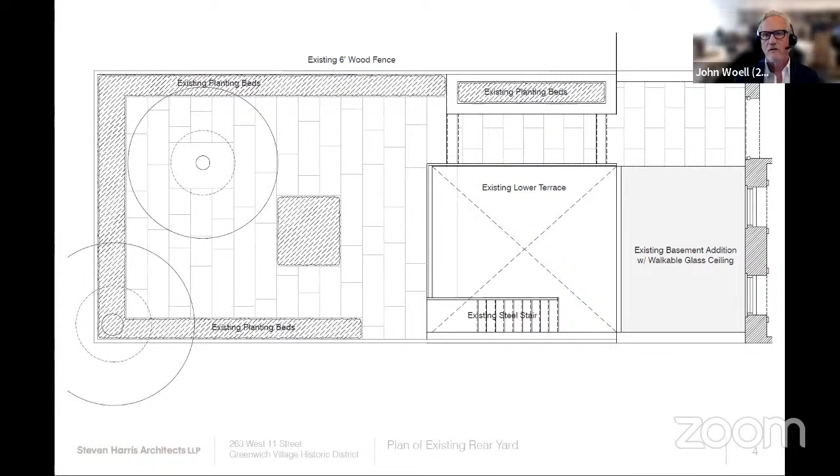The current rear yard is a combination of a glass addition, which was approved by the Commission in 1997, that opens onto an existing lower terrace. There's a stair in that terrace that takes you up to a rear yard, and then adjacent to that, there is another stair that takes you back to the house.

The proposed plan reduces the dimension of that existing lower terrace by approximately 5 feet, shifting it closer to the house, and reconfigures the stair into the backyard by sliding it underneath that construction to the east.

The pool and the excavation have been located so as to be 5 feet off of the rear lot line, over 9 feet off of the east lot line, and approximately 4 feet 4 inches off of the west lot line. The pool depth is approximately 4 feet 6 inches on average, going from 7 feet 6 inches to 3 feet.

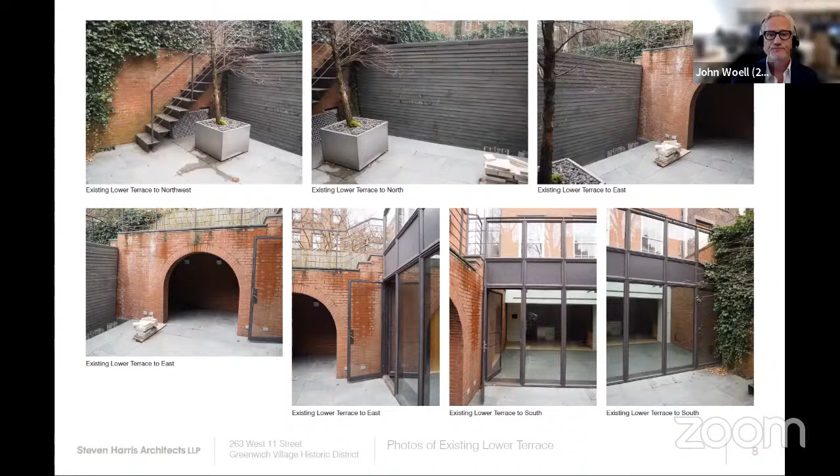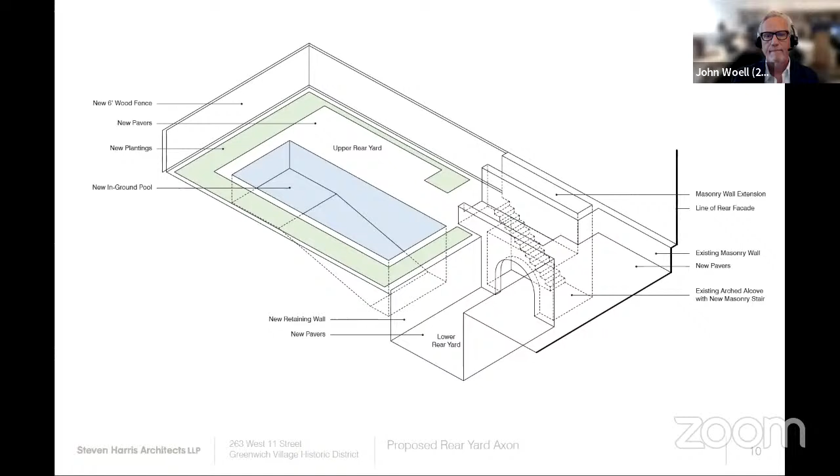This is a drawing or rendering of the materials in context. The perimeter will have plantings around it, and a number of large trees will be introduced. The courtyard will be reduced by about 5 feet. The pool will be constructed approximately 4 plus feet off of the west, and the water surface itself more than 5 feet off the north, and then 9 feet off the east. None of this work is visible from any of the public right-of-way.

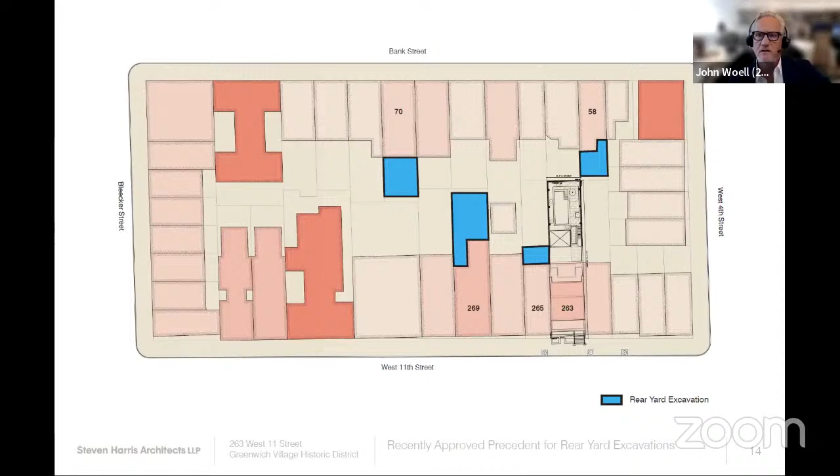Within the donut itself, there are a number of significant excavations that have been approved in recent years. I'd like to review each of those as a precedent. Let's start with 58 Bank Street.

58 Bank Street also has a swimming pool. It is a full width lot excavation, excavated to 17 feet below the yard, full width, holding back a little bit from the rear lot line, with a swimming pool underneath that garden. This was approved in 2018.

This is 269 West 11th Street, approved in 2019. This is full width excavation again, approximately 16 or 17 feet below grade, and has a pool as well.

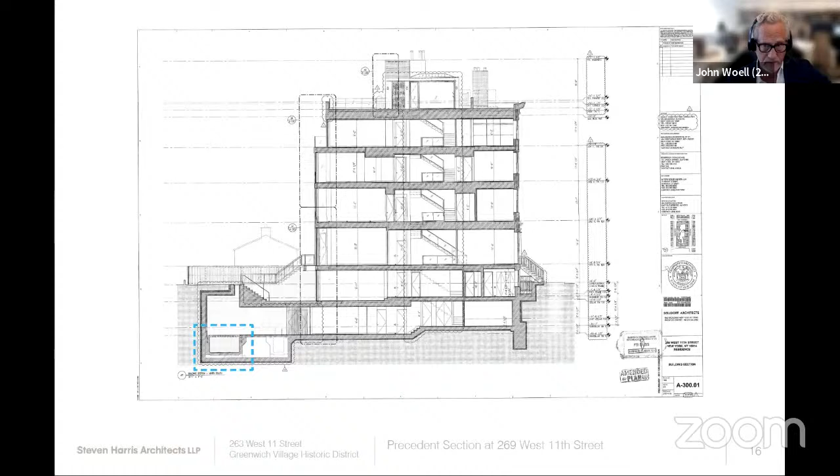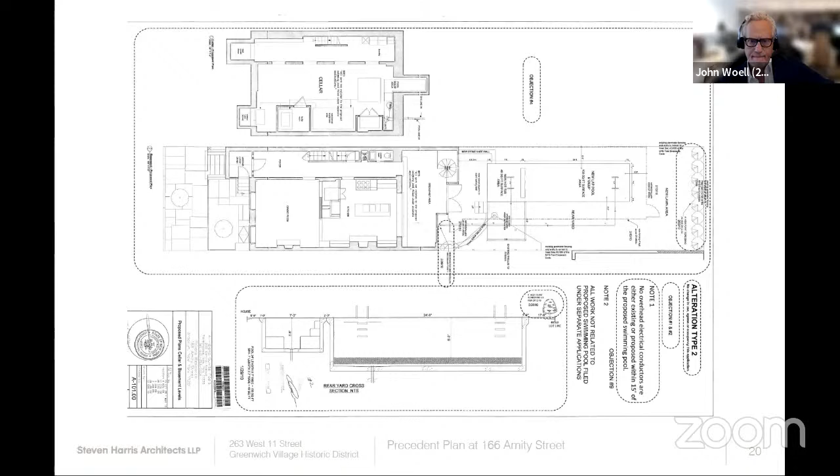Again, showing a section of that in the rear yard. And then in the Greenwich Village Historic District itself, this is 30 Perry Street, a swimming pool that was approved in 2005. Here's the approved drawings.

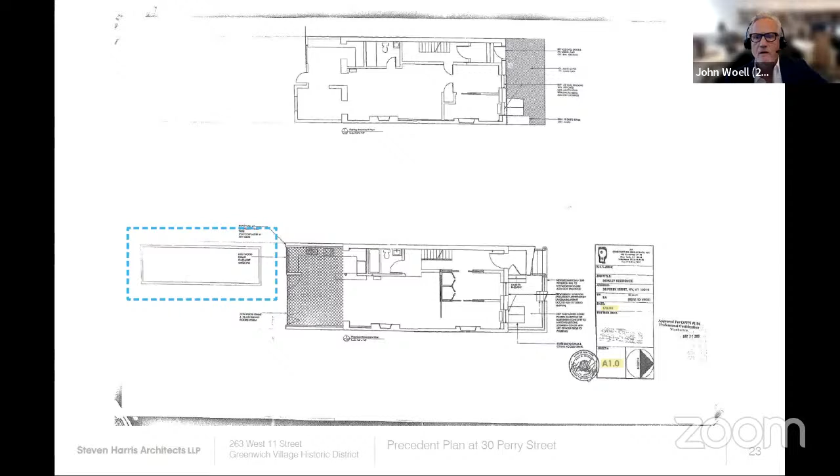And back to the section, Leo. Thank you, commissioners. Please let me know if you have any questions.

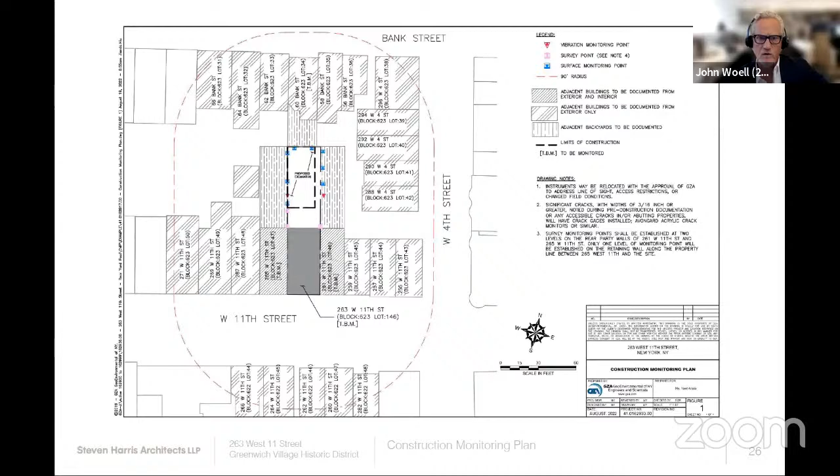Next, Leo. And then this is the monitoring plan that has been produced, which will help monitor the work as it proceeds. Back to the section if we can.

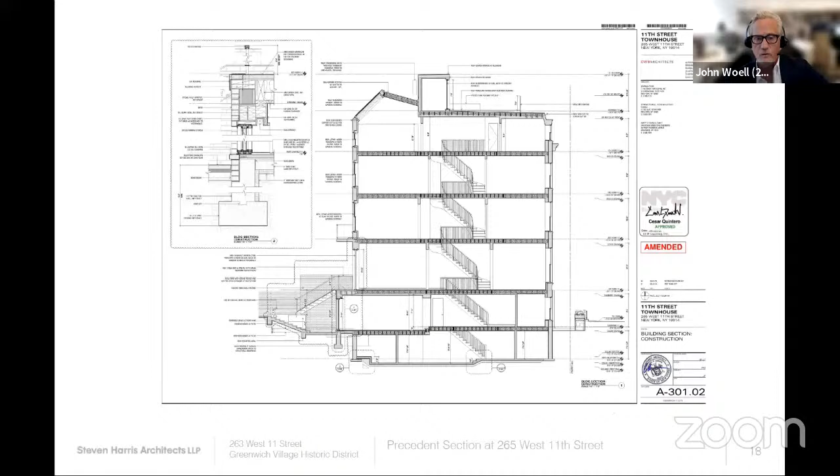So I think that one thing to point out as well is that there are 2 other swimming pools that are already in this donut. They are subterranean, but the questions raised by the neighbors about water would apply to that as well. And we are not aware of any ill incidents that have happened as a result of those pools being located there. Lastly, I would say relative to village preservation, I would say that this will not be unprecedented as we've shown.

There is a precedent 2 blocks away. It's been there for 17 years. No one seemed to have known that it even was there because no one has been paying attention. It doesn't seem to me that this is happening very frequently in the village. Thank you.

Okay, thank you. And John, can you just also speak to the 5-foot surrounding area and how that is incorporated into your plan or not? Yeah, this is going through LPC as part of the approval necessary for DOB. And so the plan as laid out with the 5-foot rear and the 5-foot back, the landscaping is considered to be an area that can be walked in order to provide safety should someone need to be rescued.

Okay, Commissioners, do we have any other questions? All right, I'm not seeing any questions, so I'm sending you all a request to unmute so that we can begin our discussion. Commissioner Devonshire, would you make a motion to close the hearing? So moved. Thank you. And Commissioner Lutfi, would you second that motion? Second. All in favor, say aye. Aye. Any opposed? All right, the hearing is closed and we'll begin our discussion.

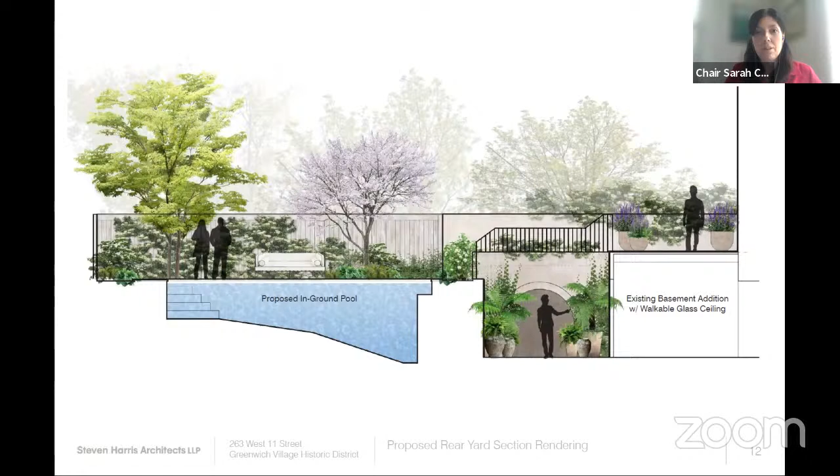And as we know, in rear yards, we review at staff level changes from paving to plantings and different paving patterns in the rear yard. So whether it's planted or paved is not necessarily the question before us, but it is a question of the pool excavation, which we do review, and we do require that you pull excavation back from the rear lot line to ensure the ability for potential deep planting.

And as the applicant has presented, we have also approved pools in this particular block, subterranean, but I think would have similar structural provisions in place and similar sandy soil. And we have approved pools at the rear yard level, I think once in this district and another in Cobble Hill Historic District. And I think I might be forgetting others, but so there is some precedent for excavation and for pools. And certainly we've approved excavation for other uses as well, below buildings and in the rear yards.

And as always, excavation would have to be monitored very closely by the Department of Buildings and approved by them. But it is something that we also look at carefully to the extent that we can, although DOB is the expert on structural issues. So we'll begin our discussion.

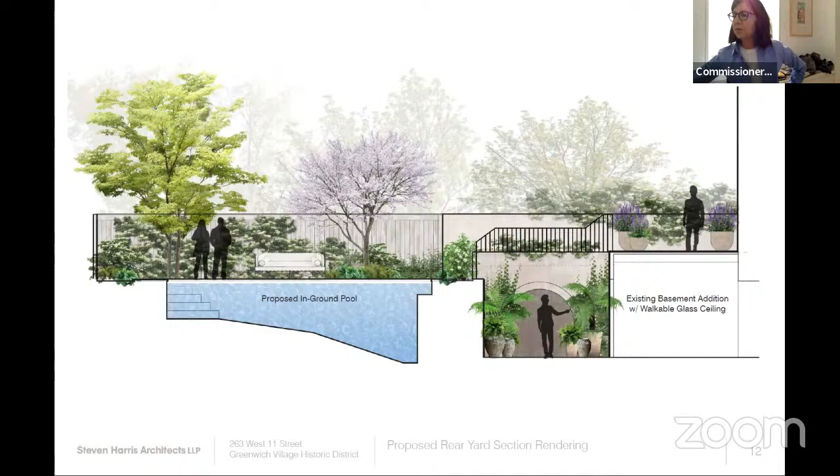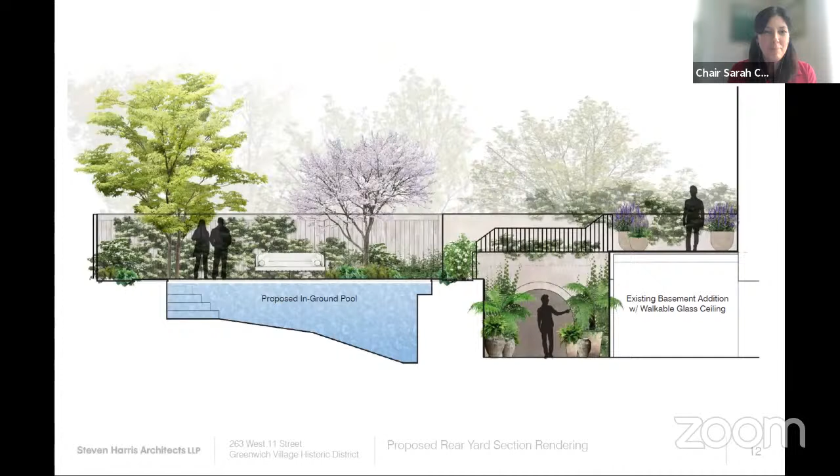Next item is public hearing item number 6, LPC 22-12020, an application for a certificate of appropriateness in the Borough of Manhattan, block 501, lot 8, 427 to 429 West Broadway in the Soho Cast Iron Historic District. This is a pair of Italianate style store and warehouse buildings designed by Robert Mook and built in 1872. The application is to replace entrance infill and install a security gate.

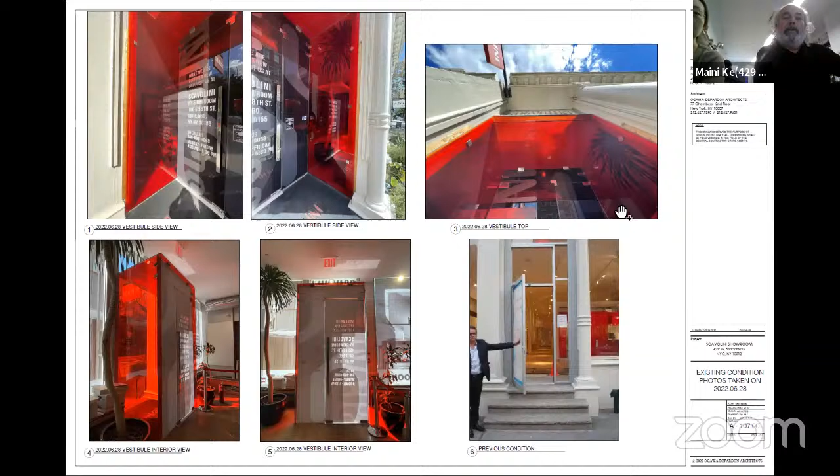This is the enclosure, a red glass enclosure, and as you can see on the top right pictures, there's wood blocking attaching it directly to the metal frame shown in the bottom right picture. That used to be the original door. So they kept the original aluminum frame and just infilled with this glass enclosure to create their new entrance to the store several years ago.

Those are the tax photos, which don't show very much, unfortunately. This is the existing condition as it is currently—a door roughly 8'9" tall, but the floor to transom height is almost 13 feet.

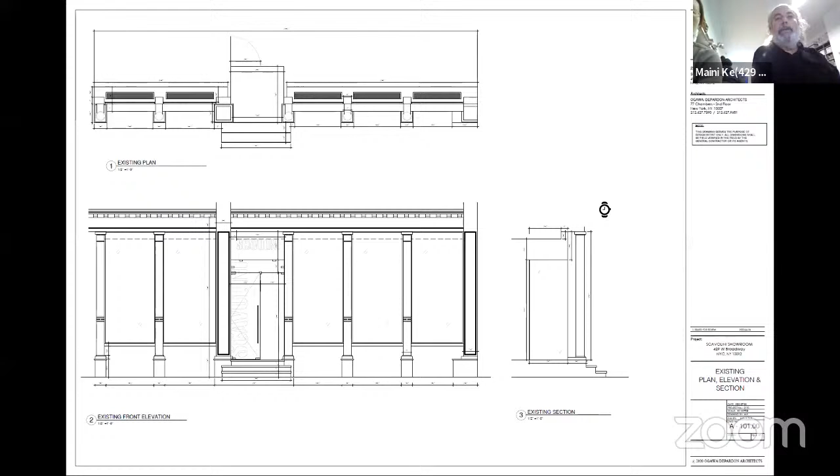What we'd like to do is replace that entire entranceway with a weather-enclosed vestibule, meaning actual walls on both sides, with a gate built into this enclosure, and a more or less full height door with transom up to 13 feet. It's slightly lower because there's a lower ceiling inside of about 9 inches, which you can see where the '429' is written on top—that's the ceiling height. We'll create a small soffit there, but basically it's a full height design.

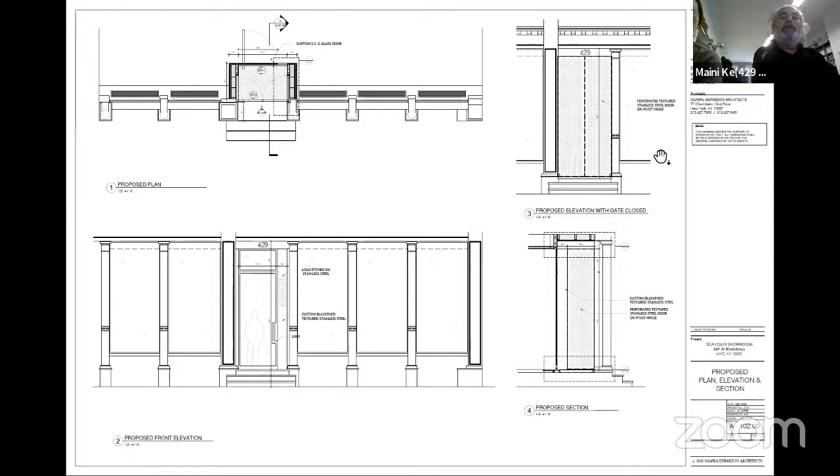The view in the right-hand corner shows the shutters in the shut position. But when they're in the open position, if you zoom in on the doors, you can see that they tuck in neatly into the walls, so they're not seen at all when open.

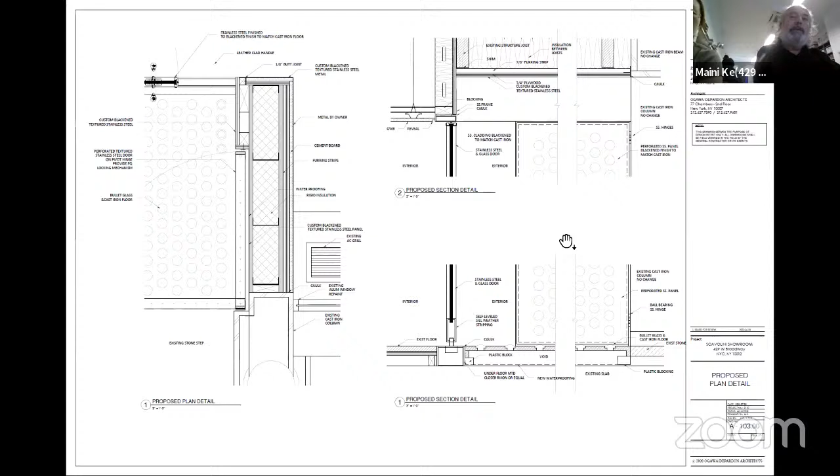That's essentially the application. The materials will be cast iron bullet glass for the floor, and all other materials will be a matching blackened stainless steel—acid etched stainless steel matching the same finish. We have a sample we can show you, and then a stainless steel glass door. The bottom rectangle is the stainless steel we're planning to use, which has this blackened finish.

This is just to show you some examples of doors in Soho, most of them on West Broadway, tall and skinny, more modern doors which are precedents that have been done. Some of these are actually on the west side of the street, which I know was not landmarked for a long time. So that's what that is, and I'm happy to answer any questions. Okay, thank you very much.

All right, commissioners, do we have any questions? All right, I don't see any questions at this time, so let's see if we have public testimony.

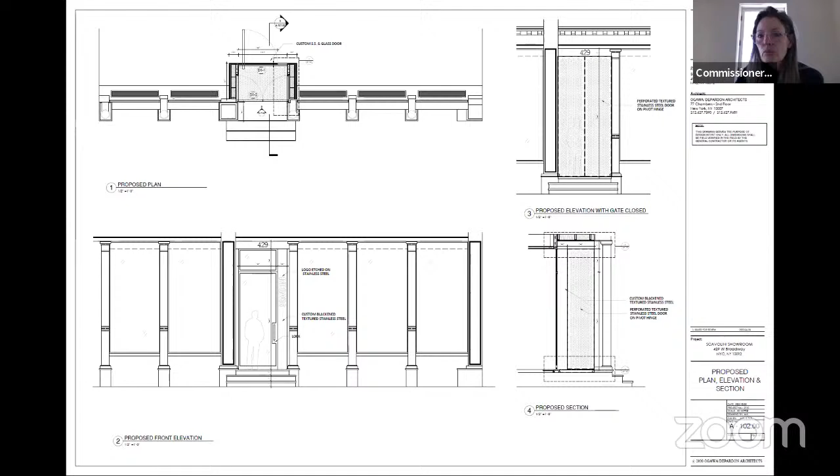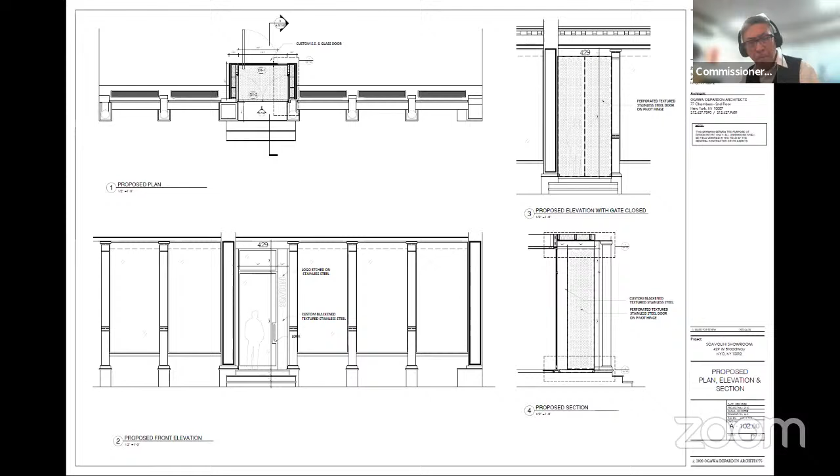Chair Carroll, aye. Commissioner Bland, aye. Commissioner Shamir Barron, aye. Commissioner Chapin, aye. Commissioner Chen, aye. Commissioner Devonshire, aye. Commissioner Gustafson, aye. Commissioner Lutfy, aye. With 8 in favor, none opposed, the motion passes. So that's approved. Thank you.

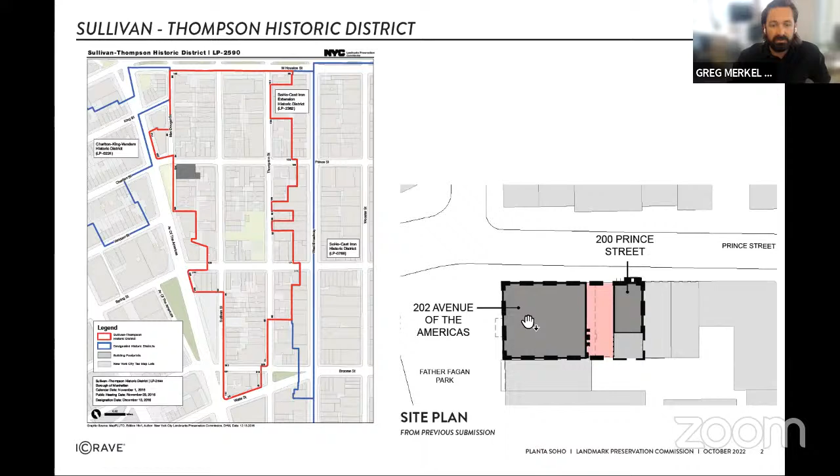The restaurant is located on the ground floor at the southeast corner of Avenue of the Americas and Prince Street in the Sullivan Thompson Historic District. There are two white brick buildings owned by the same entity, a 6-story building on the corner and a 4-story building on Prince Street. Between the buildings is an open courtyard, which we'll be using for outdoor seating.

The buildings were redeveloped and reclad in white brick by the architect named David Krause in the 1960s. The December 2016 Thompson Sullivan Historic District Report notes the buildings as non-contributing, meaning they do not contribute to the historic district's sense of place. The style is noted as no style. You can also see, in the lower right-hand corner here, that there used to be a white brick low wall that spanned between these two buildings. We'll tie into this later.

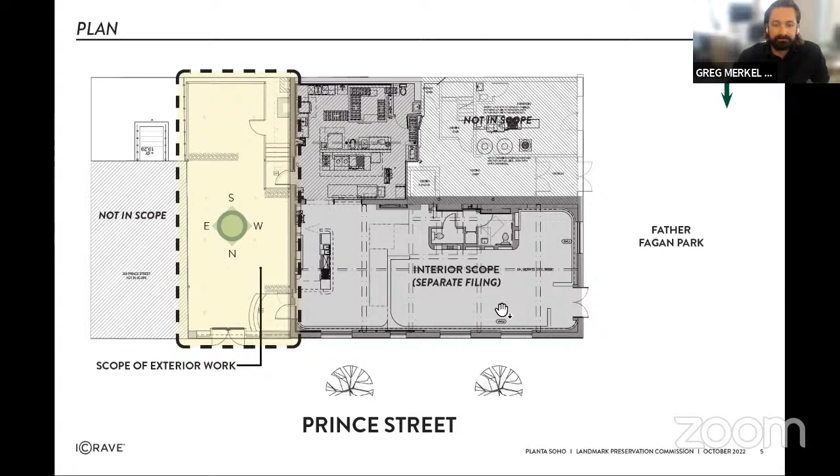Here you can see a plan of the restaurant shaded in gray and the courtyard highlighted in yellow. The space was a florist shop up until recently with a metal and plywood wall between the buildings. The wall had a roll down shutter.

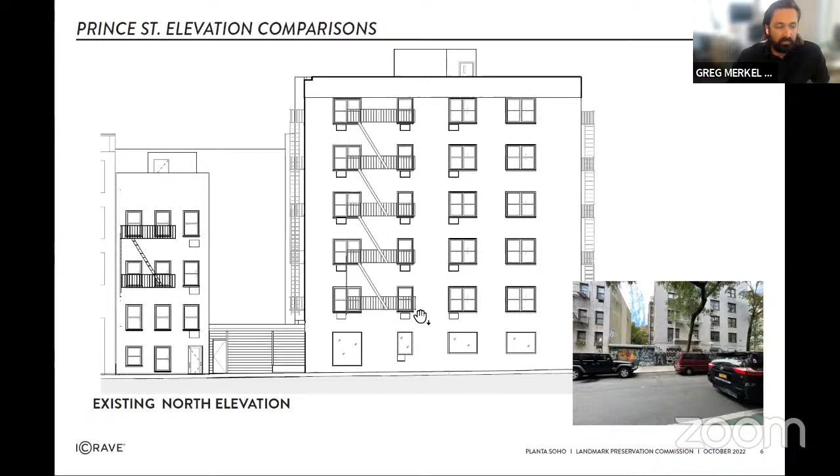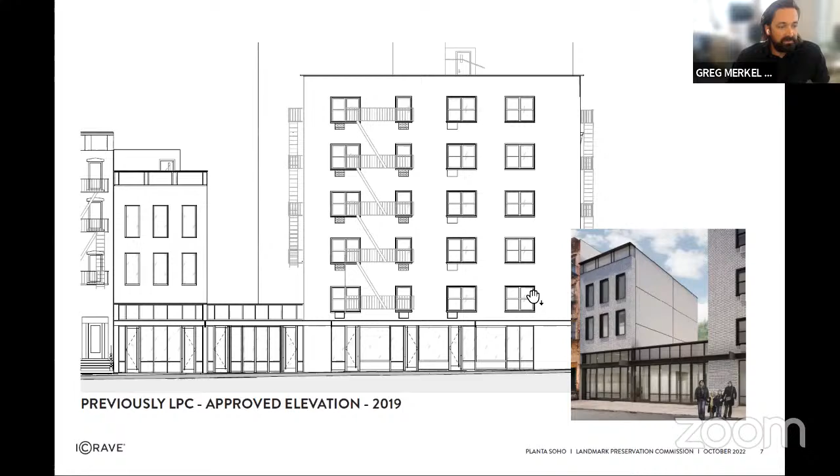In 2019, the Landmarks Preservation Commission approved a steel and glass reworking of the entire ground floor, including in both buildings and the courtyard area. You can see that here. We are therefore proposing a modest design that brings back the white brick wall from the 1960s.

As this wall is a design that reverts to the previous iteration, we hope this can be approved with greater ease. The other elements, the halo lit signage, the bracket sign, these will follow the LPC signage guidelines, so we hope that those can also be approved with greater ease.

We want to support the street wall, so the new wall is coplanar with the walls of the adjacent buildings. Just the doors are recessed for code reasons—when open, they cannot protrude more than 18 inches into the public domain. The door frames would be black metal, the same color as the design approved in 2019, and a match to the building's existing window frames. We want to harmonize with what is already there.

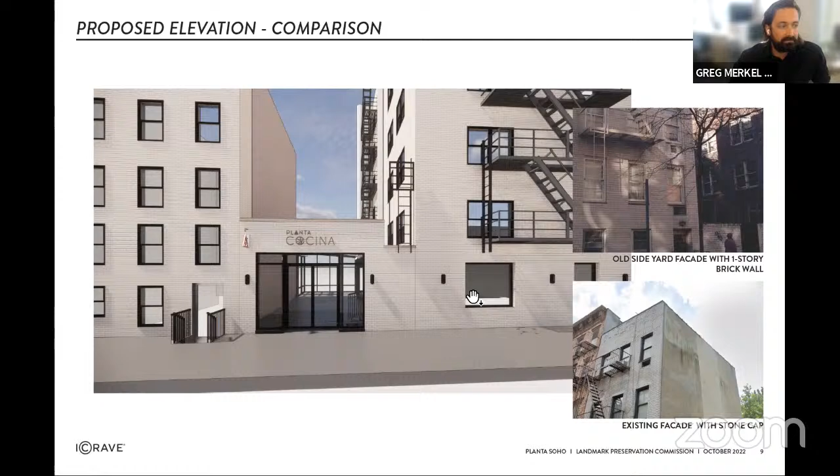Inside the courtyard, the boarded up masonry opening on the west wall would be bricked up with a slight recess to signify that a window was once there. The masonry opening on the right would be changed to a door and a window and would not directly align with the windows above, similar to the 6th Avenue entryway to the upstairs apartments that you'll see in a second. So these are the openings, bricked up, new door and window here.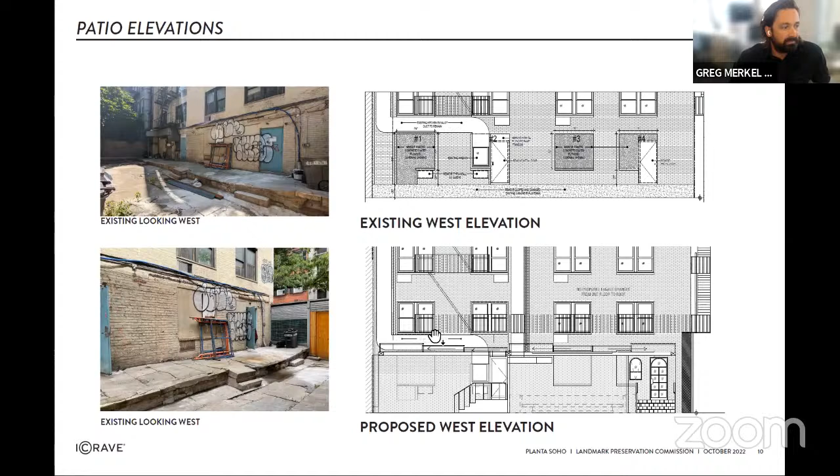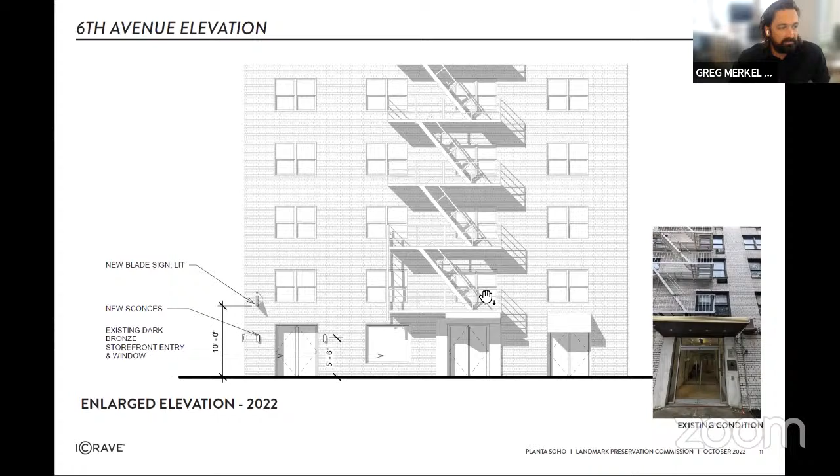This is the 6th Avenue side, where you can see the restaurant entry door, new sconces, new blade bracket sign. As well, you can see that there is a non-aligning door. This is the main entry door into the apartment, which does not align to the windows above.

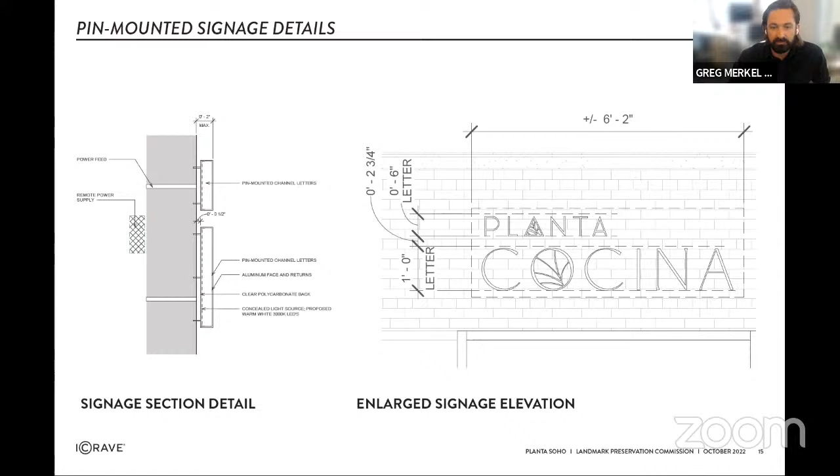The wording of the signage is made up of halo lit pin mounted channel letters. The letter sizes are 6 inches and 12 inches high. They stand 2 inches off the wall. The bracket sign is shown here. It is 18 inches high, 2 inches wide, with a 5-inch wide mounting plate, and it stands 19 inches off the wall. The finish would be rose gold. The signs are top lit, as mentioned, with a specified fixture.

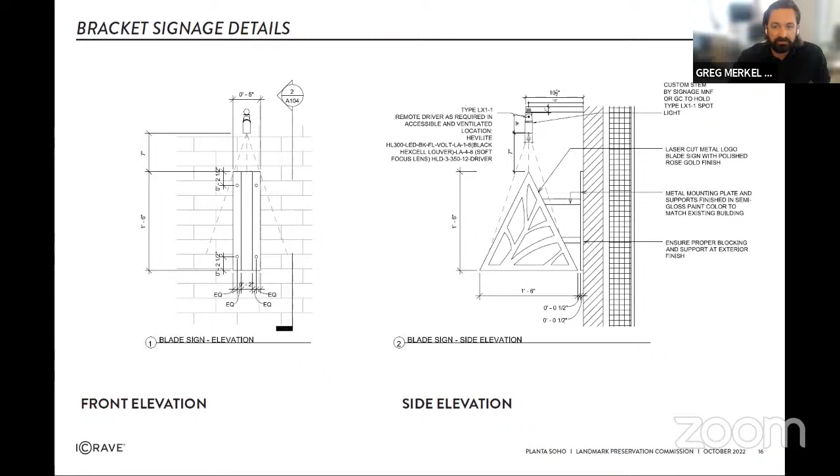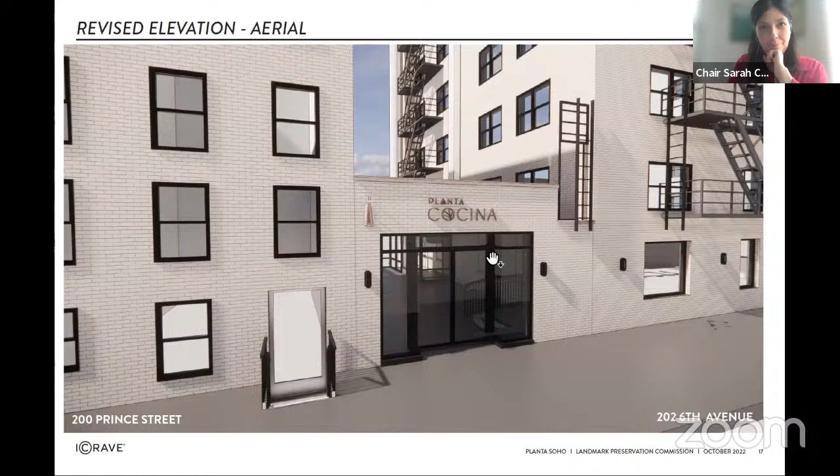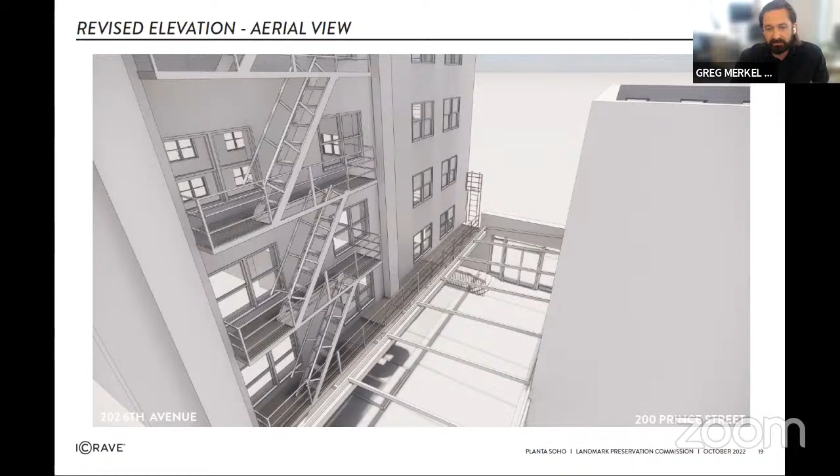Finally, this view from the back shows the various elements, including the roller cover, sliding glass cover. This is not visible from the street, other than looking through the windows. We understand that there are certain elements that will be reviewed by the DOB for code compliance, like door sizes, exit pathway distances, etc., and the State Liquor Authority for operational issues such as background music or operating hours. We have been working separately on these items and assure compliance. Our focus here are items that pertain to Landmarks Preservation Commission issues.

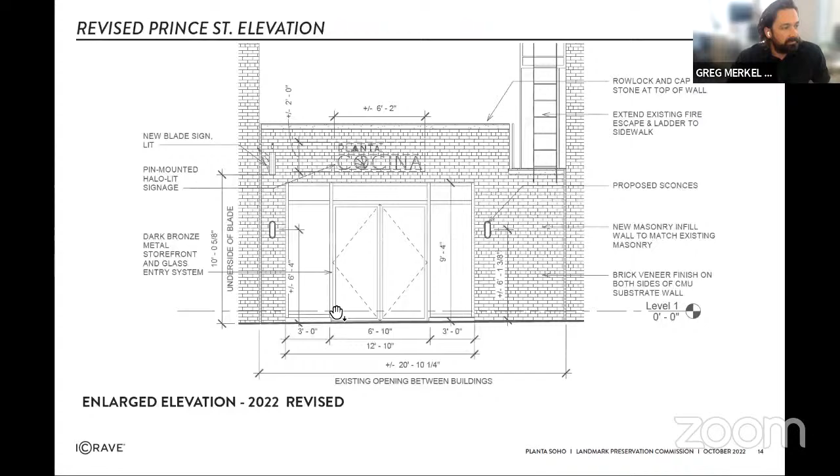Okay, and thank you. Thank you very much. Thank you very much. Okay, commissioners, do we have any questions?

All right, I don't see any questions at this time, so why don't we see if we have public testimony. If you're in the meeting and would like to testify on this item, please raise your virtual hand so we can identify you.

I will turn it over to Sonia Gior to take us through the testimony. We do not have any signups in advance, and I'm not seeing any hands raised presently. So I will note for the record that Manhattan Community Board 2 recommended denial of the roll cover, the design of the street wall, the blade sign, and the infill wall sign. We also received 3 letters in opposition to the application expressing concerns over the facade as contextually inappropriate and the indoor space expansion. I'll turn it back to you, Chair Carroll.

Okay, thank you very much. So I'd like to turn back to you, Mr. Merkel, and ask if you'd like to respond to the comments. I know you had an earlier design, and that may be what you presented at the community board. If that is the case, you can explain that.

Yeah, I think those are in reference to what was presented before, which was a design that, while it was interesting and looked good, was deemed not appropriate for the neighborhood. So like I stated in the beginning of my presentation, we went back and really tried to think of how to best make this truly appropriate for not only the neighborhood, but for the site.

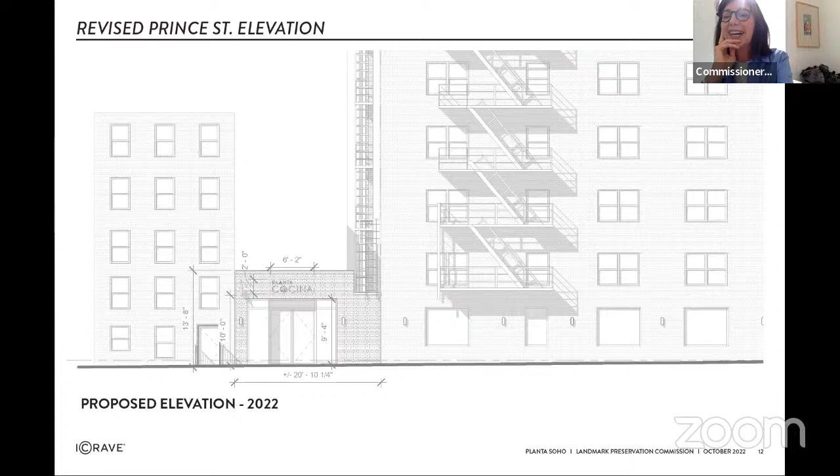Sure. This is a big difference from what we had approved, which I remember thinking was very interesting. But this is, I think, not only interesting, but very well done in an understated and discreet way. It completely blends in with what is there, and it makes very efficient use of whatever available space exists. I like the use of the white bricks, and I hope they can match pretty closely. I think the sconces are very understated. The retractable roof is really smart, and it's nice that it's off the street. I think it's well done. I can approve this.

Okay, thank you. Commissioner Gustafson. Yeah, I saw the comparison to what we approved previously, and then my reaction was, what were we thinking?

This is a great use of a non-contributing building. It's a much improved proposal. It's a terrific use of a gap in a street wall and a way to fill it. It conforms, it improves on what's there, it does no damage, and it activates the street. I'm all in.

Thank you. Commissioner Shamir Baran: I agree. This is a really interesting design, and it's appropriate for the location.

Commissioner Chapin: I remember the previous proposal, which I liked some aspects of, but would have liked a few changes in. I really like this. I think this is great. I think it's just right.

Thank you. Commissioner Devonshire: Excellent, I can approve it.

Commissioner Chen: Likewise here, I agree with Commissioner Gustafson. What were we drinking? Wasn't that long ago. Commissioner Bland: Was that drinking or thinking?

I'd love to say this is a great scheme, approvable scheme, appropriate scheme for two non-contributing buildings.

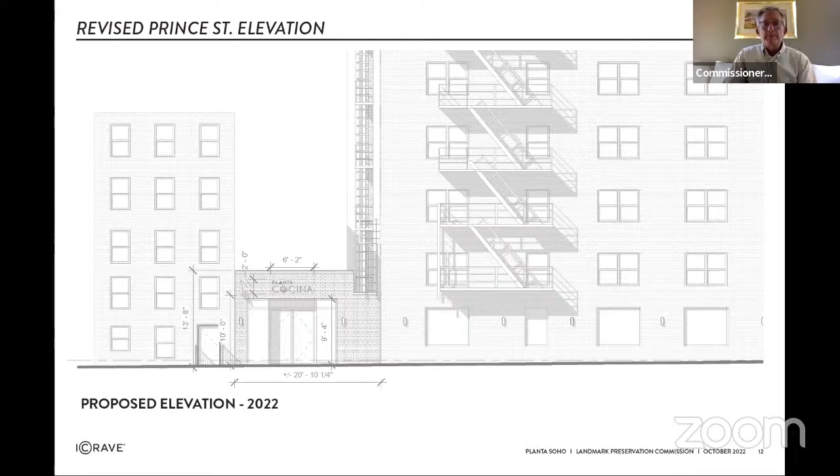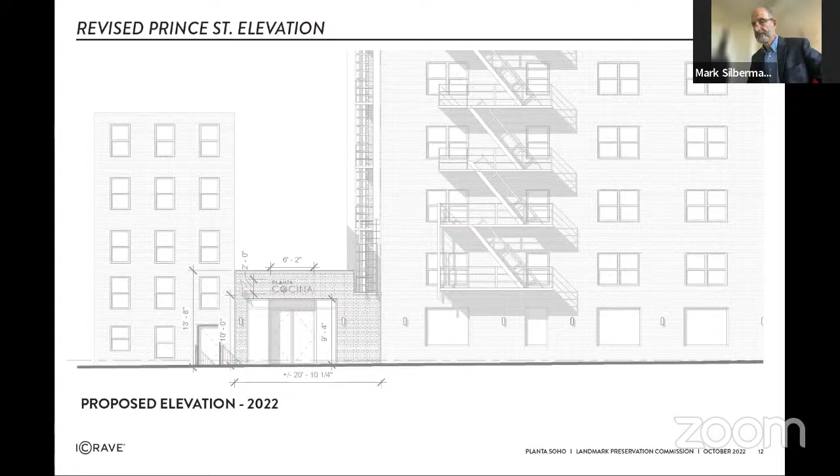Chair Carroll, Aye. Commissioner Bland, Aye. Commissioner Shamir Baron, Aye. Commissioner Chapin, Aye. Commissioner Chen, Aye. Commissioner Devonshire, Aye. Commissioner Gustafson, Aye. Commissioner Lutfi, Aye. With 8 in favor, none opposed, the motion passes. So that's approved, thank you.

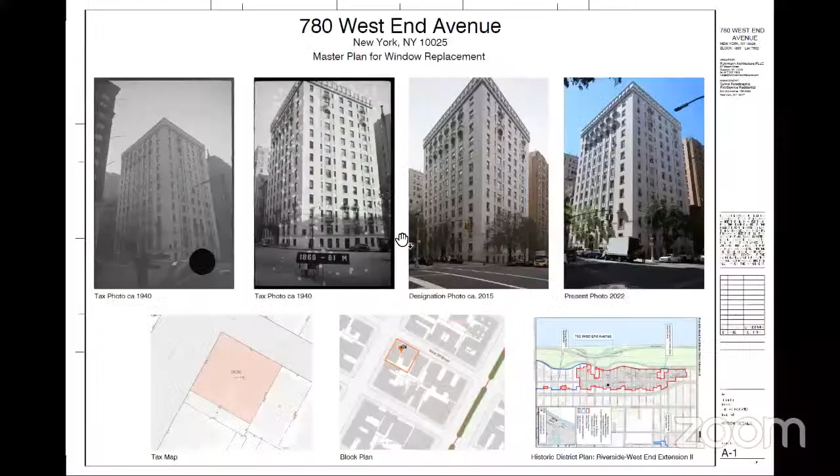Good afternoon, Commissioners. Richard Lowry, Preservation staff. So the proposal, as Corey mentioned, is the master plan for windows at 780 West End Avenue. As you can see from the historic tax photograph on the left, the historic configuration of a number of windows are 2 over 2, if you can see on the corner, and then there are some very wide windows which have a 3 over 3 configuration. Previously, the commission heard last year an application for a single apartment to install 1 over 1 windows, and that was approved with modifications to go back to the historic configuration, and comments were made that a single apartment would look odd. So consequently, the owners of the building have come in for a full-scale master plan, and they are proposing to go with 1 over 1 double-hung windows.

Just to give you some shots of the courtyards on the front facades, there are basically 2 historic windows remaining, which are at the courtyard. You can see them in the bottom left corner.

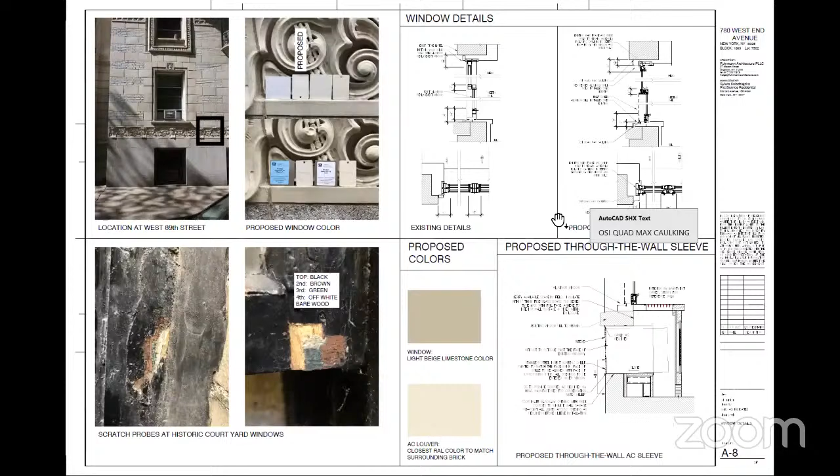And then here are the detailed window elevations and sections. The architect, Helga Furman, is here to answer any questions. Thank you very much. Okay, thank you, Richard.

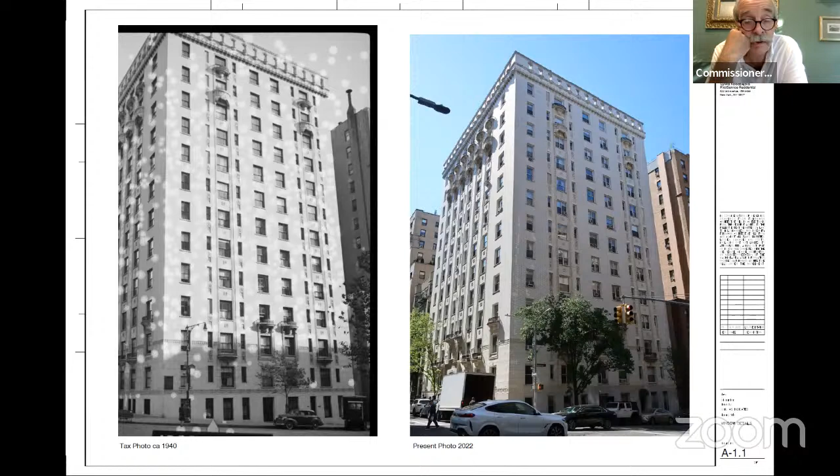Okay, thank you. Commissioner Devonshire? In my opinion, much of the articulation comes from the original windows. It's a once in a lifetime opportunity to get rid of Orphan Annie and go back to the 3/3.

Okay, thank you. Commissioner Chen. I guess the majority seems to be now preferring to go back to the original, so I would defer to the majority.

Okay, so we definitely don't have enough to vote to approve the 1/1 today. And I believe actually going back to the original configuration would be a staff level permit. So I think we can take no action and ask the applicant to continue to work with the staff. And I assume that any proposal for secondary facade windows would also be handled at staff level pursuant to the rules and would meet those rules. Okay, so we'll take no action on that item and we'll move to the next hearing item.

Okay, the next item is -- all right, public hearing item number -- whoops. Commissioner Lutfi, do you have a question? So I just want to make sure I understand. So does that mean that they'll make individual applications and then they'll come to us?

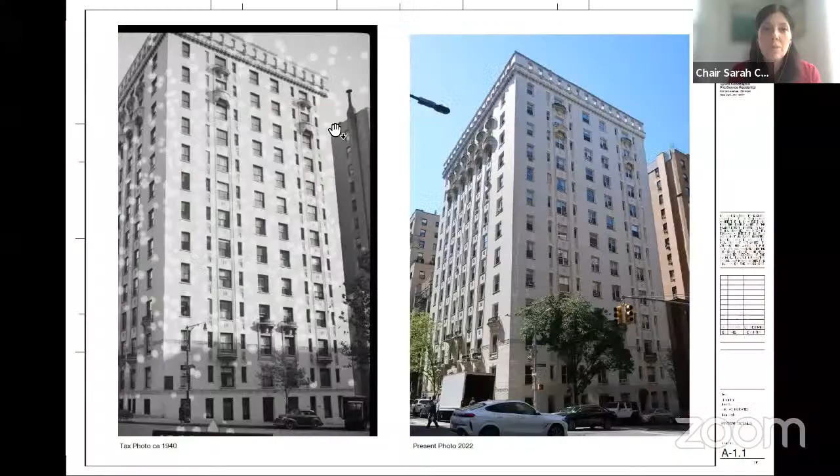They can choose to do a master plan for the historic configuration on the primary facades, and that would be eligible for a staff level permit because it would be matching the historic configuration. Okay, got it. Okay, thank you.

That's great. Thanks. All right, next item is public hearing item number 9, LPC 22-02413. An application for a certificate of appropriateness in the Borough of Manhattan, block 1166, lots 13 and 14, 231 and 233 West 74th Street, the West End Collegiate Historic District Extension. It's a pair of Queen Anne style row houses designed by William J. Merritt, built in 1885 to 86, and the application is to reconstruct the front facades.

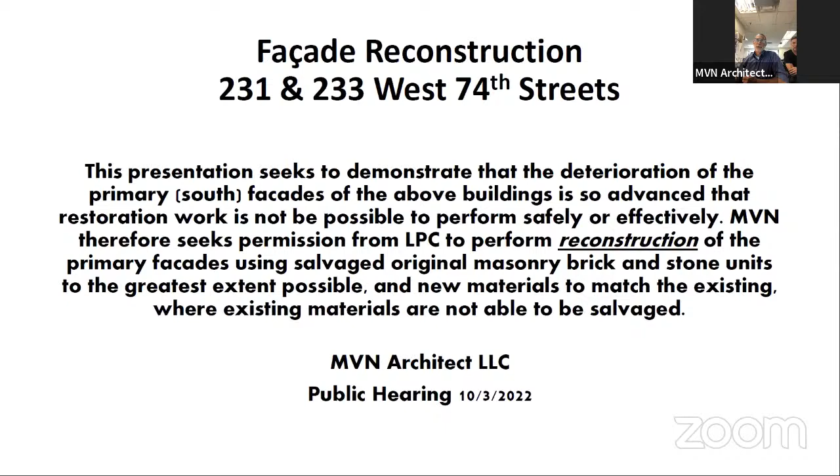The reason we're here is that we are asking for the public hearing approval for the reconstruction of the facades, after a consideration of the options versus the option of restoration versus reconstruction. And we feel that reconstruction is the only way to address these buildings.

You can see from the buildings that there's a considerable amount of vertical displacement on the front facade. You can see it at the street wall, at the stairs, at the base of the building, at the tilting stairs, and at the lintels, at the top of the parlor floor, the second floor, the third floor, and so forth as we go through the building.

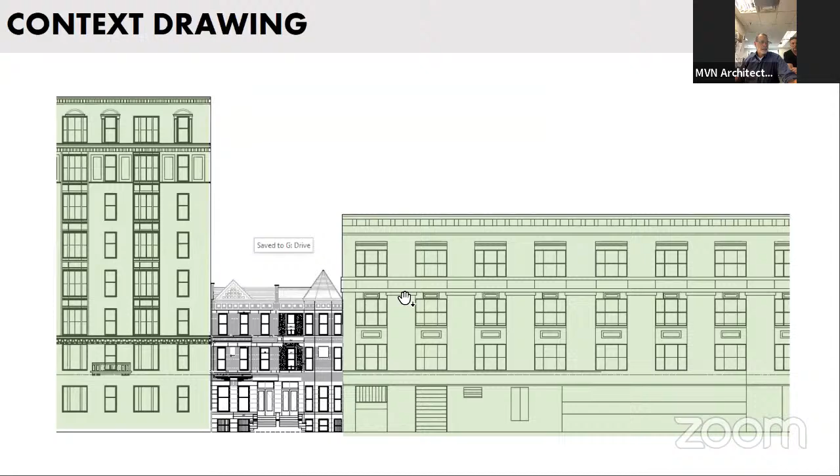This is a context drawing of the building. This is a photograph that was actually derived from the 1940s tax photos, which serves as the standard for our reconstruction application.

Through a series of piping mishaps from the 1940s on through the present day, that leakage has actually contributed to the vertical displacement that we are seeing at the facade in its present condition.

So the standard for reconstructing the facade comes from two main reasons. Number one, safety in constructing these facades, or safety in restoring these facades under a restoration program, is a major concern. We feel, and our structural engineer also feels, that it cannot be safely restored. These lintels, which traverse the entire thickness of the wall here and on this level and on the top floor, have to be taken out. They've failed. They've got cracks in them, and that traverse the entire thickness of the wall.

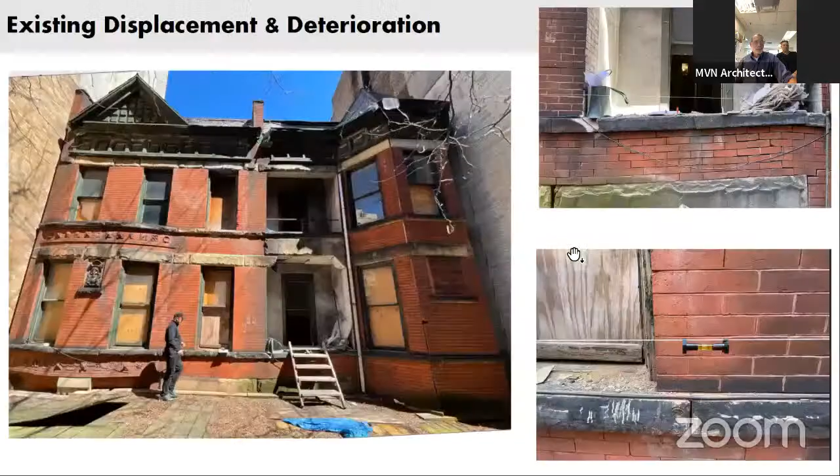Safety is paramount. Number one, in restoring, and number two, the displacement in a restoration program would not be addressed. That is a major distraction.

Sorry, I think you just disappeared for a moment. So if you can just repeat that last sentence. Okay, safety is a major issue. Can you hear me now? Yes, we can hear you now. Okay, there we go. I don't know what happened, but safety is a major issue.

It's paramount in restoring these facades. Safety would be really compromised in a restoration program, and it triggers the need to reconstruct the facades. As you can see, the lintels are cracked and displaced.

Not only is the displacement a major concern here, which serves as a major distraction to the historic features of the building. If we were to merely restore the facades, we would result in just a cleaned up version of what you see here, which I feel, as a preservation architect on this project, would be a major distraction to the building, because once again, our goal is to restore the buildings via reconstruction to the 1940s standard.

We have photographs taken in 2012, which is when we first discovered the major displacement, and we first discovered the panels of brick that were leaning and cracking and so poorly bonded to the backup masonry. We did Windsor pin testing, embarked on a program to study the inner layers of masonry to see if restoration was a practical way of doing this, just ignoring the vertical displacement for a moment.

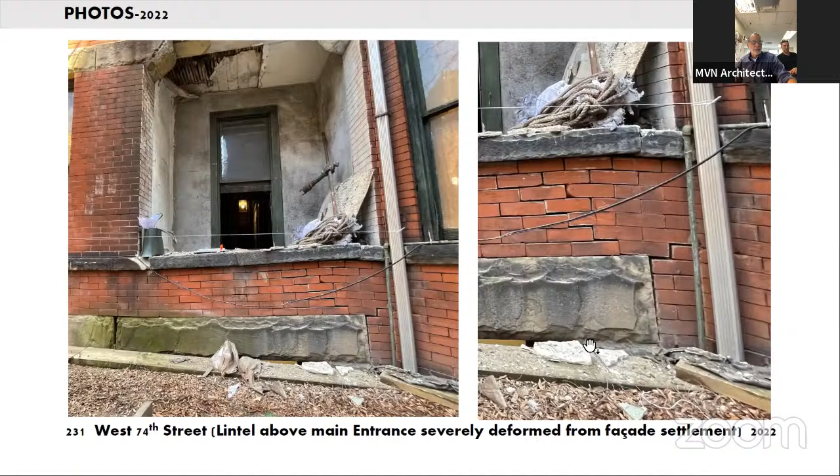These are photographs of some important preservation elements on the facade which have settled very badly. The owners of both buildings are looking to take them apart, catalog all of the components, and rebuild true and plumb in accordance with the 1940s tax photos. The terracotta elements, which are in excellent condition, would be reused. The Ohio sandstone elements would also be taken down, cataloged, and kept in a safe, weatherproof location during construction, then reconstructed in their original location once everything has been cataloged.

This is an example of how poorly bonded the face brick masonry is to the backup masonry, and also how soft the backup masonry is, making restoration of the facade not feasible. Again, ignoring for a moment the vertical displacement.

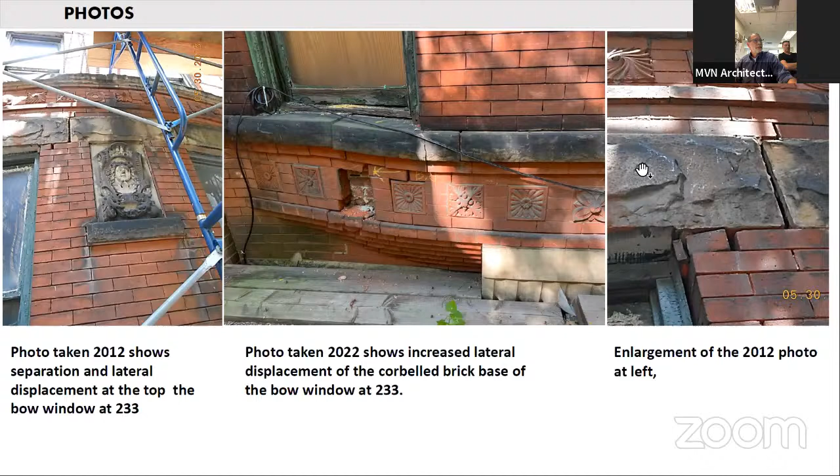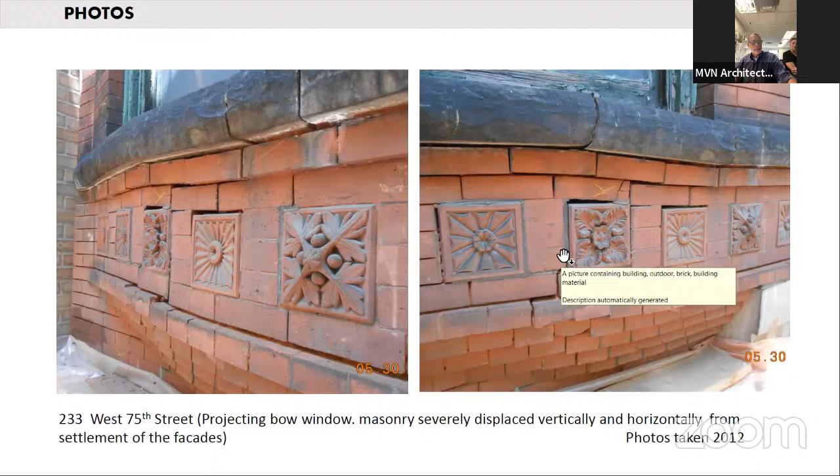The bow window, the rounded window on building number 233, is leaning outward. You can see by the corbels here, and it's just crumbling. So we have worked with our structural engineer to come up with, if reconstruction is approved, a very robust detail for this, which would not affect the aesthetics at all.

We found that this panel, also between 231 and 233 West 74th Street, is also leaning outward, as you can see by the change in dimension from the deteriorated face bricks at the bottom of the opening to the top of the opening. We mentioned earlier the mortar has lost its tensile strength. The Windsor pin tests of the backup demonstrate that there's not much left.

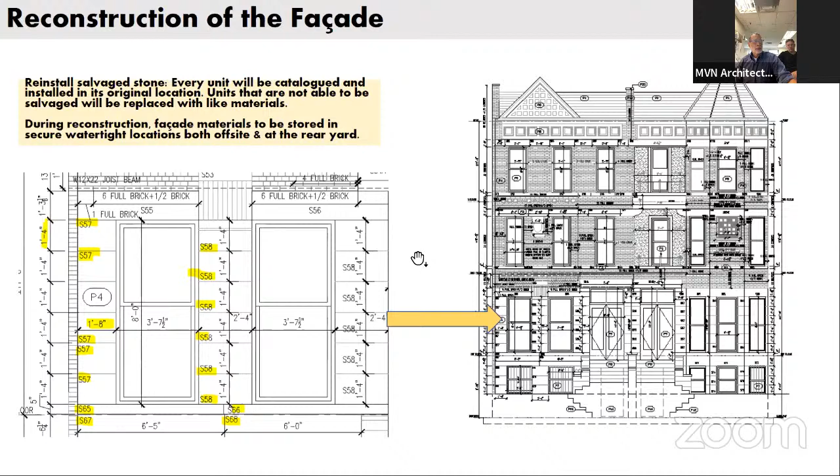We've done a lot of cataloging of the facades of both buildings for the purpose of our application to landmarks. We have decided, along with the staff level, to request a public hearing for the reconstruction, because we feel that's the only way to get back to the 1940s standard.

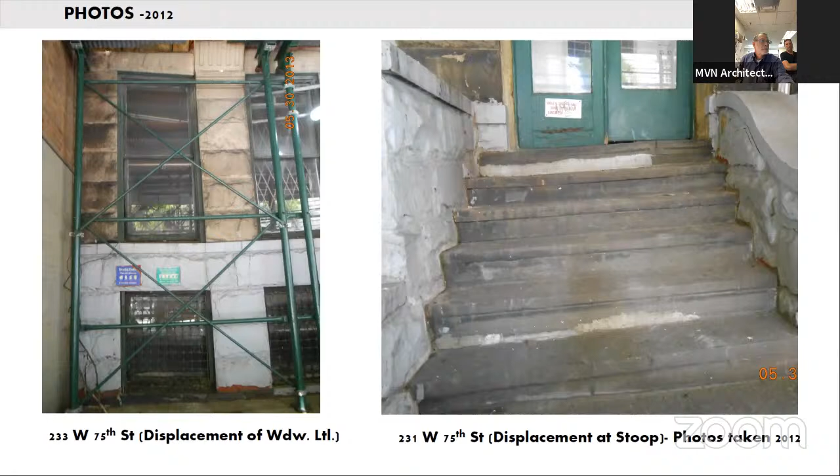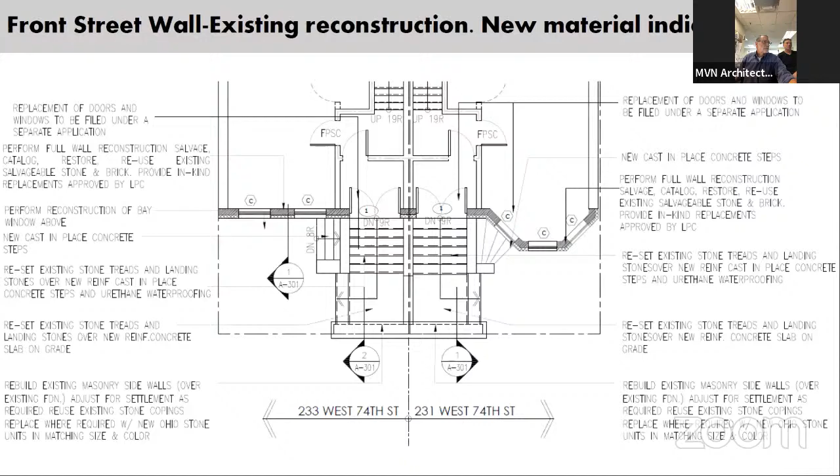All of these - the curvature of the street wall, the settlement of the front steps - all of these elements during a reconstruction scenario would be corrected so that they would be built plumb and true. This is a diagram of what we had planned. We've got construction details to make the reconstructed element more robust than it was originally constructed, so that it would avoid leakage under the stairs. This is the street wall.

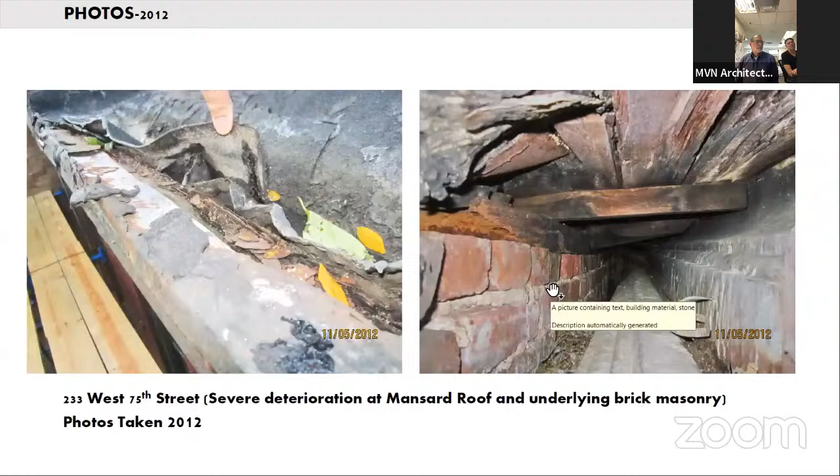Some of these elements need to be replaced with new Ohio sandstone. Finally, the photographs showing the slate roof, which we feel requires reconstruction done with all new materials. Pressed metal is largely salvageable and reusable. The end caps need to be reconstructed.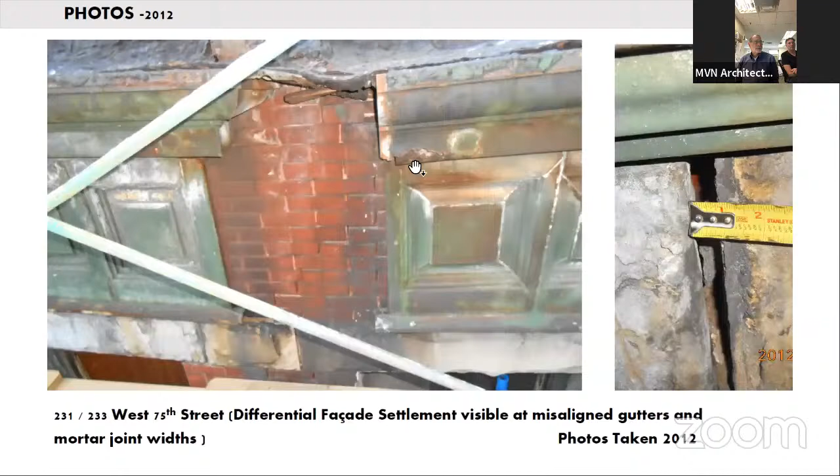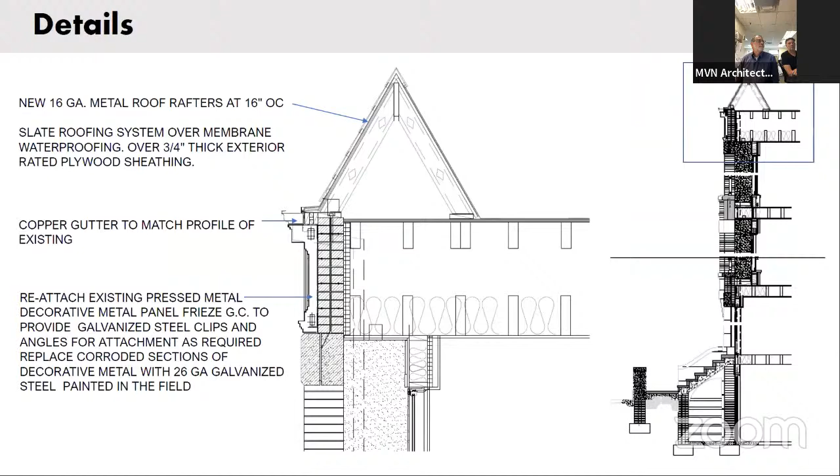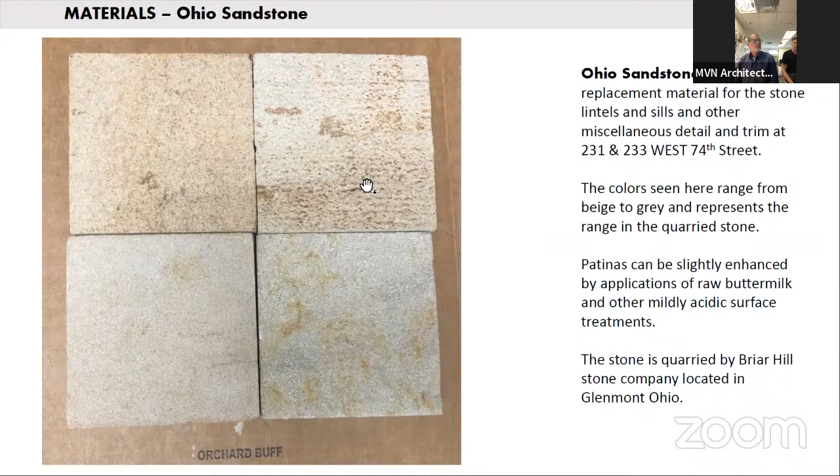We've studied the details and we feel confident that we can match the building integrity of the 1940s tax photos using largely the existing materials with the new Vermont slate 75-year product. The Ohio sandstone we checked on, and it is available in a multiple of colors, and the colors can be adjusted using tried and true techniques that can establish a patina on the stone to match our stones. We would be able to really zero in on that when we dismantle the facade and clean some of the stones, and bring in the Ohio sandstone representative to get an exact match.

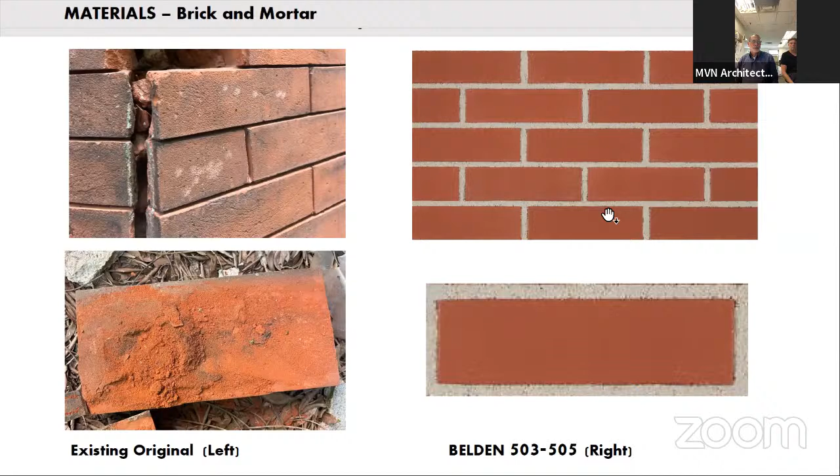These are two products that were currently sent to us. They're not quite there yet, but we feel it's not a challenge - there are many ways we can match the existing Ohio sandstone. The brick, again, some of it's bad, but as I indicated on the photograph showing where reused materials would need to be replaced with new materials, we found brickwork that matches the original building facades with no problem.

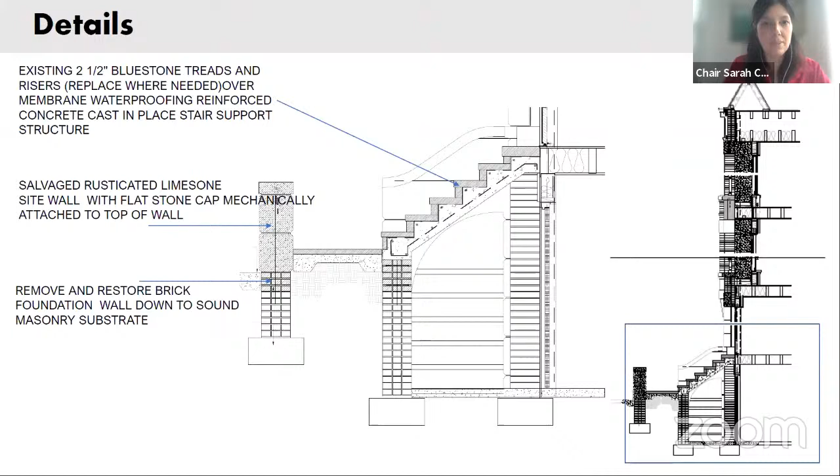Okay. All right, so first I will say that we have lost a quorum, so we will not be able to vote on this today, but we will still have a discussion among the commissioners who are present, so that we can be sure of a specific direction, so that you can come back quickly, understanding that this is a somewhat hazardous condition that I think we do want to address in a timely manner.

I would also say that normally we would want to see primary facades stabilized and retained with necessary repairs and replacements made. And it may be technically feasible to keep some portions here, but I think the deteriorated conditions of these facades are quite severe, and major settlement in the masonry is apparent.

A lot of the masonry would have to be replaced in any event. So the applicants presented today a proposal to dismantle and reconstruct it, and they are, as presented, committed to carefully salvaging and reusing as much of the masonry as feasible, and matching the details as closely as possible—which of course would have to be monitored with measured drawings and monitored by staff, should there be an ultimate approval here. So let's begin our discussion.

Commissioner Devonshire, would you start this one? I am happy to start this one. I am possibly the most skeptical person on earth when it comes to restoration versus recreation, reconstruction. And when we first were shown those photographs of the building in the background, and the applicant was telling us about all the cracks, I said, oh man, here we go—someone's going to try and get one by us. In fact, once we saw those detail photographs, there is absolutely no question in my mind.

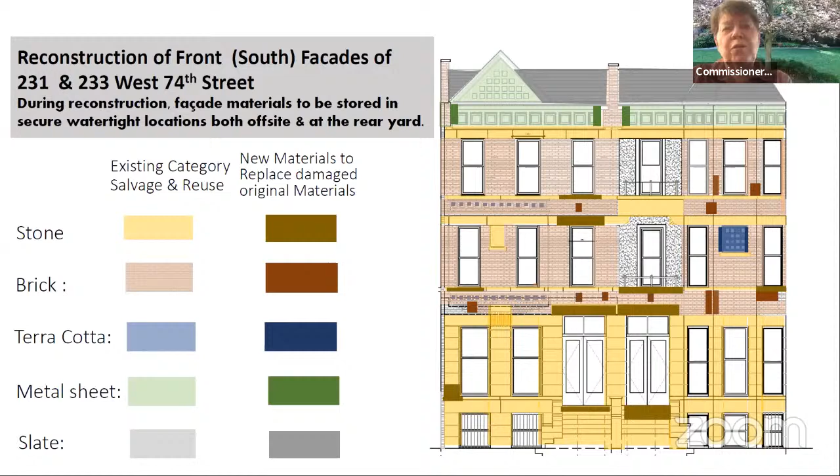Great, thank you. And Commissioner Chapin. Yeah, this is absolutely necessary. The building is in really terrible condition, and this is a great project, and just has to be done, obviously, with great care, but obviously that is the intent of the applicant.

So sorry we can't approve it today. Great, thank you. And I'm sorry we can't approve it either, because I know this has been a condition for a long time, and I think the sooner they can start working, the better.

And again, I appreciate all of the care that has gone into the assessment and the planning for the dismantling, salvaging, and reusing, and the discrete new materials where needed. So we'll bring it back to the next possible public meeting and present it to a larger group of commissioners, noting our recommendation to move forward with an approval.

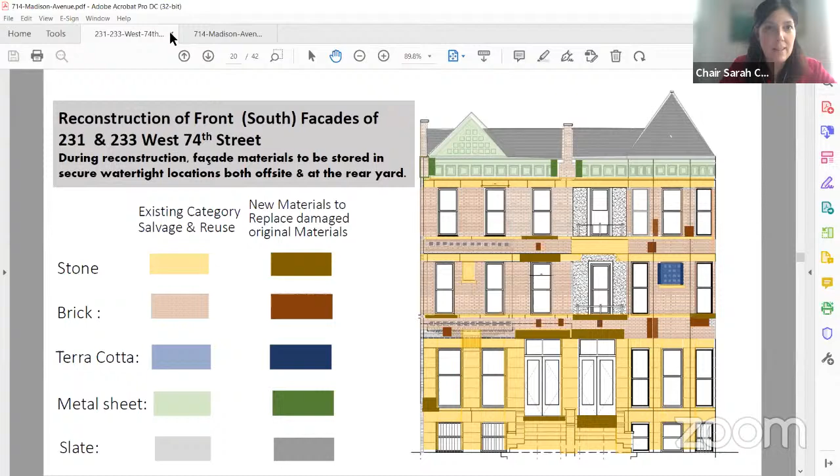Okay, and that is public hearing item number 10, LPC 22-12085, an application for a certificate of appropriateness in the Borough of Manhattan, block 1378, lot 15, 714 Madison Avenue in the Upper East Side Historic District Extension. This is an Italianate neo-Grec style row house designed by Gage Inslee and built in 1874, with a storefront addition built in 1926.

The application is to install signage and awnings. This was originally advertised with light fixtures as well, but those are accent lights that have since been determined to qualify for staff level review. So it's the signs and awnings that you'll see today.

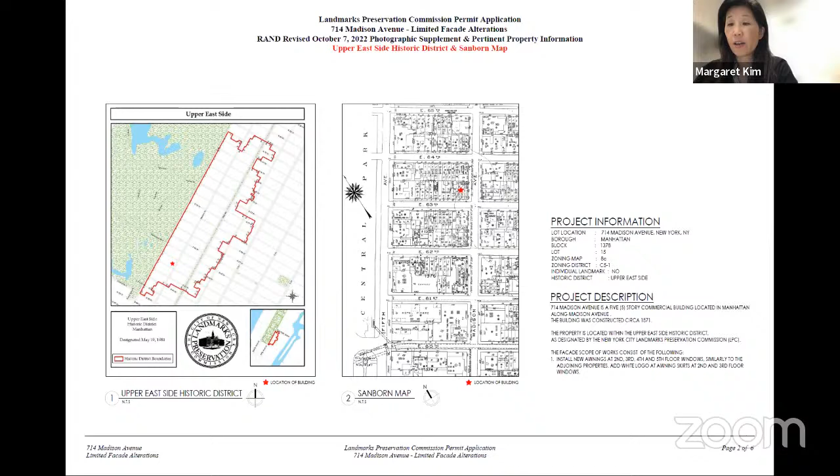Here we have the historic map of the Upper East Side Historic District and the Sanborn showing the location of the property with its project description. And I will briefly... sorry, could you please help me go back?

So we are proposing the installation of new awnings at the 2nd, 3rd, 4th, and 5th floor windows. The new awnings will be similar to other properties along the retail corridor on Madison Avenue.

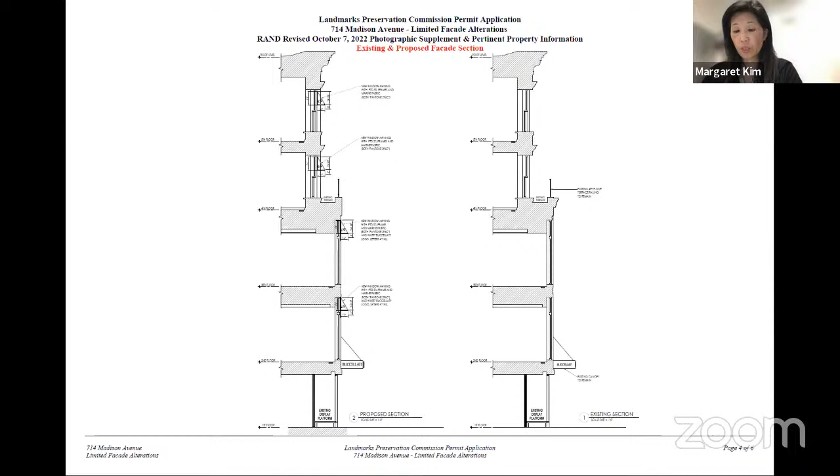Here we have an enlarged elevation and section of the upper windows on the left side, and on the right side, the awning elevation and section at the lower windows.

The proposed dimension of the window awnings will be the width of the existing windows by 2 feet and 1/8 inches tall, with a 9-inch skirt, constructed with a 1x1 tube steel and cladded with Sunbrella fabric. The color will match Pantone PMS 296, which is a navy blue, and the framing of the awning will be painted to match the fabric color.

At the 2nd and 3rd floor, which is the extended storefront, we're proposing to add a 4-inch tall white letter Buccellati logo printed at the awning skirt. The awnings at the 4th and 5th floor windows will have the same skirt detail without the logo.

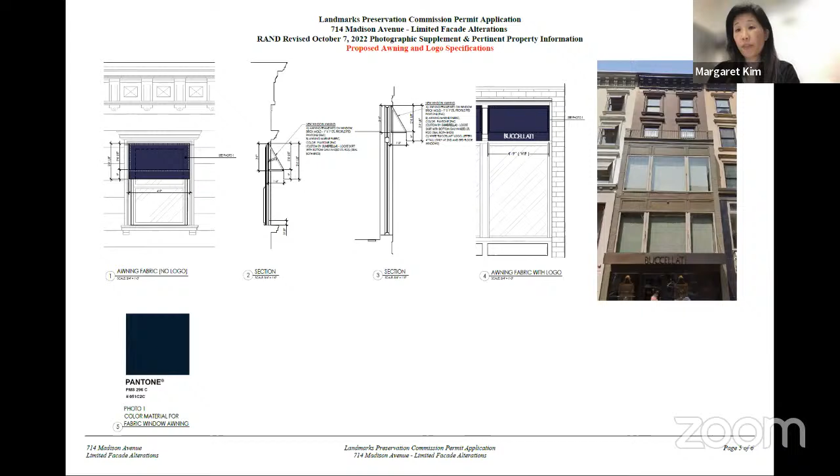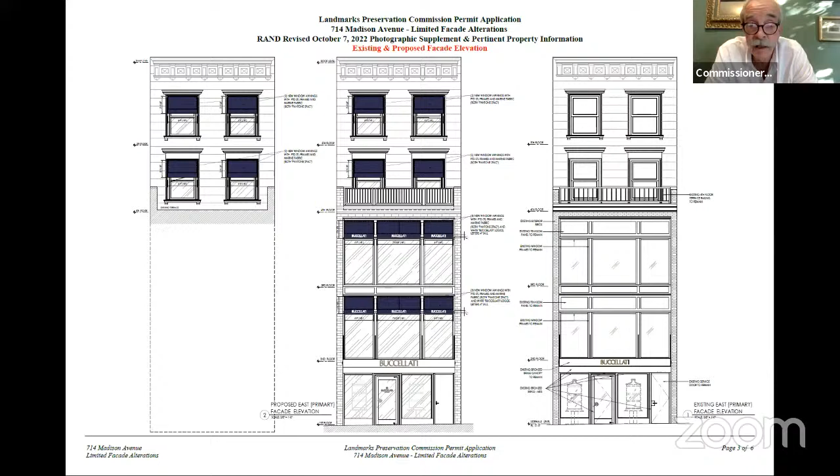Commissioner Lutfi. Yeah, I'm just going to point a couple things out. I'm in agreement with what Diana and Michael said, but that 745 example that was used, which was on a different kind of building, each awning wasn't particularly well done, but each awning had another part of the name of the business, which is a spa.

So it was sort of like Madison Laser Spa 1, 2, 3. So this is different. What's happening here instead is the building now has lovely signage at the base, it's also in the door, and it's just too much signage. It actually, from a branding standpoint, I think it does a disservice to your brand. So I would say at a maximum it should be just the middle windows. If awnings are even necessary on the second and third floors, I personally wouldn't have them. But if they're going to be there, I absolutely would also recommend that there's no signage on the upper floors.